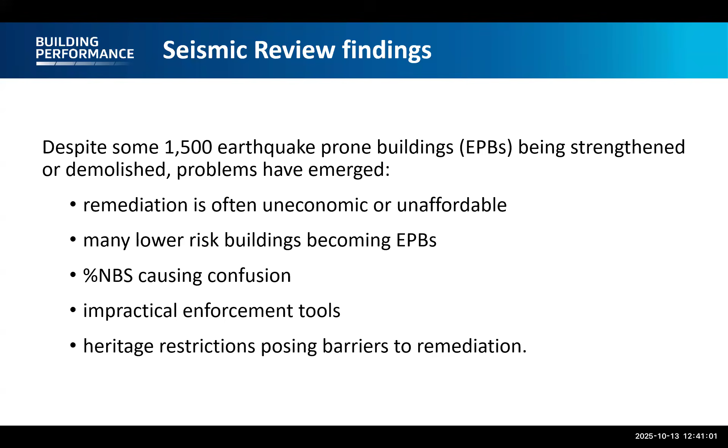And unfortunately, you can see the same situation all up and down main streets across provincial New Zealand. This is not an isolated case. This is actually quite a mainstream problem that provincial centres in particular are having.

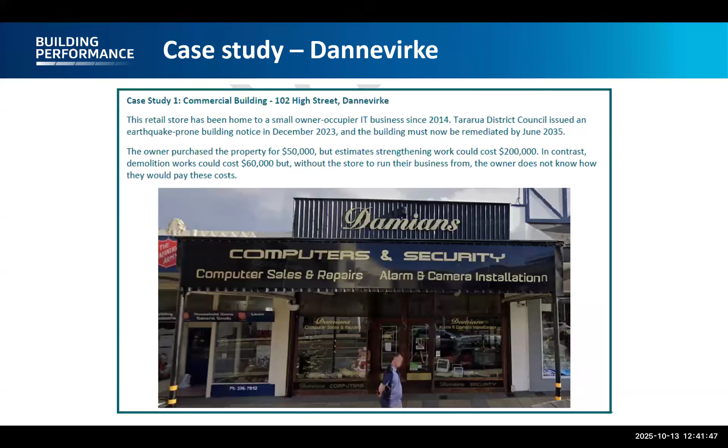So a fairly typical example, a couple have bought a building with a view to doing it up. They thought the remediation would cost 400,000. It ended up costing 600,000, and this couple, at least in the news article that I read, were blaming at least some of that on over-enthusiastic engineers who were perhaps building in a bit more redundancy than this couple thought was necessary.

And there's some interesting points that come through this. And one of that is that there's quite a lot of myth and reality around the EPB system. I wouldn't take all of this necessarily at face value, because another thing that we hear a lot about, which actually isn't the reality, as far as I'm aware, is that we hear a lot of talk about shifting goalposts, and the earthquake strengthening requirements are always going up. So what we do now won't hold later on, which just isn't true. And MBIE hasn't run the system like that at all.

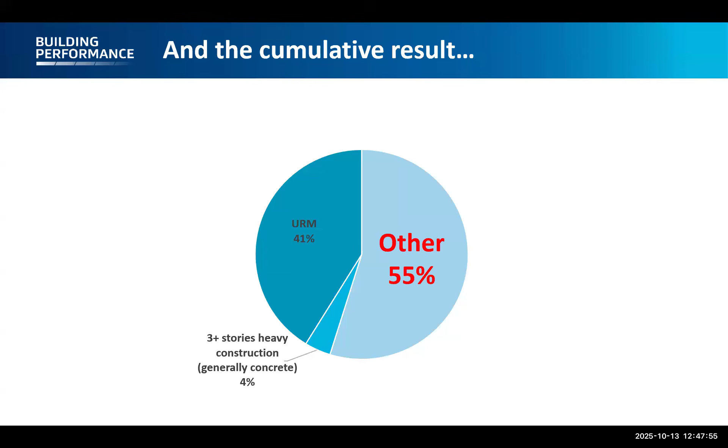The reason for that uncertainty is a lot of property investors or would-be property investors are looking at a property and going, yes, well, maybe it's not an EPB now, but how do I know in 1 week's time, 6 months' time, 2 years' time, it won't be an EPB? So no, I'm not going to invest any money in that building. I'm not going to do it up. I'm having nothing to do with it. And you can imagine that all of those people saying that all up and down the country is actually impacting on the use and investment of property types in New Zealand.

So in light of all of these issues, here is what the government is proposing in terms of solutions. Firstly, only two kinds of buildings will be able to be EPBs, and they are unreinforced masonry, which is profile category 1 of the current profile categories, and multi-story, that is 3+ story buildings of concrete or heavy construction, which is profile category 2. Profile category 3, which is the pre-1935 buildings, is taken out of the system, so that will no longer exist.

And a further filter is that only those kinds of buildings in medium and high seismic zones can be EPBs. So that is to say, any EPB in a low seismic zone will no longer be an EPB, and no new EPBs can be added in low seismic zones.

There will be cheaper and simpler mitigation requirements for the remaining EPBs. And when I say cheaper and simpler, I actually mean more cost effective, because they will still manage risk. And Ken is going to spend quite a lot of time talking about how these solutions still manage life safety risk. But one thing I do need to emphasize is that the proposed changes won't come into force until a new law is in place. And until then, the current requirements continue to apply.

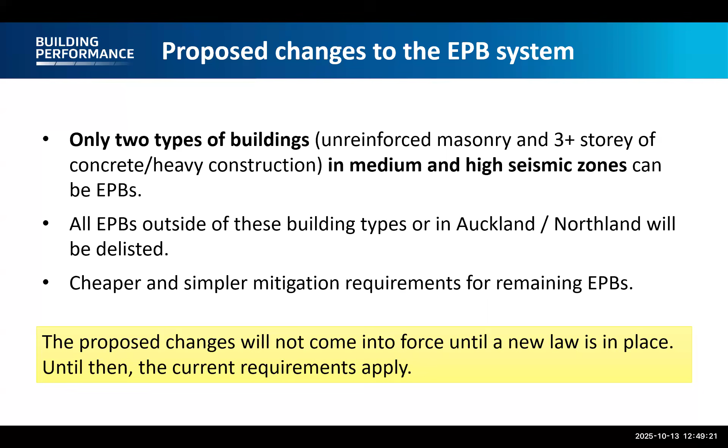Whereas for unreinforced masonry buildings, if they are 1 to 2 stories and they're in a rural area or a small town, they will only be on the EPB register. They won't need a physical notice, and they won't have a seismic work requirement. So they'll have no deadline, no notice on the door, but they will be recorded on our register, and prospective owners or tenants will be able to look up that building and determine its status from our register.

Those same buildings, however, if they're in an urban centre, 1 to 2 story URM buildings will require their facade to be secured. And when we talk about facade securing, we're talking about the facade that fronts onto any public space or elements of the facade that are above any neighbouring buildings. That facade securing requirement, again, applies to 3+ stories in rural or small towns, but for the small number of 3+ story URM buildings in urban centres, they will require a full retrofit, which is equivalent to the current requirement to get beyond 34% NBS.

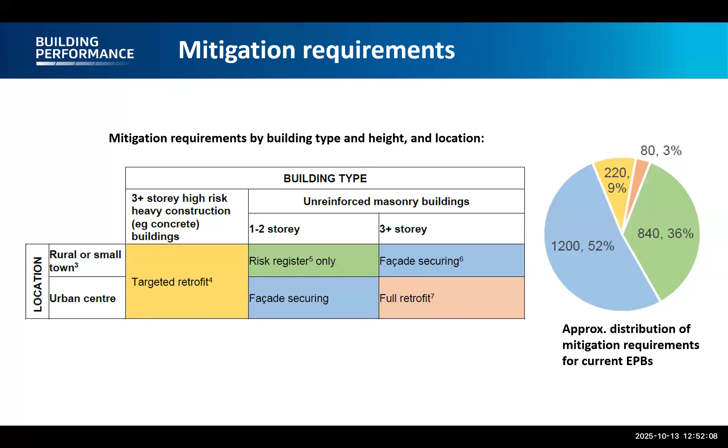So it's worthwhile bearing in mind that the 3% of buildings that require a full retrofit is a reduction from 100% of buildings under the current regime that would have required a full retrofit. In other words, 97% of all EPBs in New Zealand will have changed remediation requirements. There's also a bunch of other changes that we're going to be making, which I'll briefly run through.

We're changing the alterations requirements so that a building consent for seismic work and only seismic work that meets or goes beyond the building's remediation requirement will no longer trigger the requirement for concurrent work to meet other building code provisions relating to escape from fire and disability access and facilities.

The government is well aware this is quite a big call and there will be voices for and against it, but it actually responds to a recommendation that was originally made by the Royal Commission back in the day. And the reason is that building owners, rightly or wrongly, have reported that they are being put off doing the seismic work because of these additional requirements. And ultimately, it's a question of, well, what will save lives here? And so the government is looking to change those requirements, but only as they apply to earthquake-prone buildings, not for any other buildings.

Just in terms of change of use, when an EPB is changing its use, instead of needing to be as near as possible to the relevant building code standard, it will only need to meet its mitigation requirement. And importantly, where that building is a 1 to 2 story URM in a rural area or small town, the mitigation requirement is just to be on the EPB register. So there will be no requirement for seismic work.

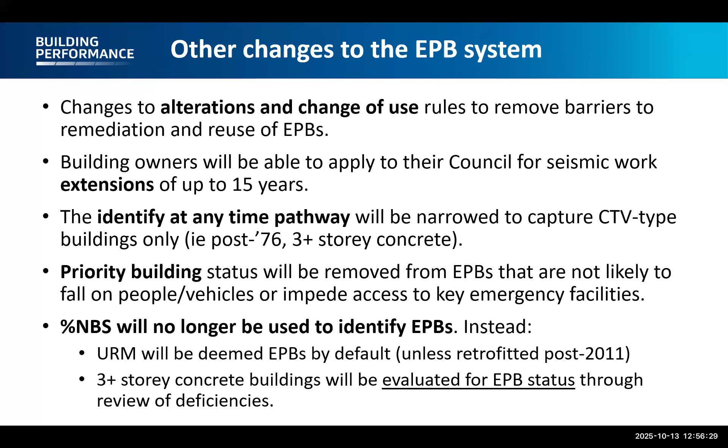And multi-story concrete buildings will be evaluated for EPB status through a review of deficiencies. And that review of deficiencies is at the very core of the methodology for targeted retrofit, which Ken will be talking to very shortly.

So just on the timeline, the government has a very ambitious agenda for this bill. The minister's told us very clearly that he would like to see this bill passed before the House rises for the election next year. So that's likely to be around September, if all goes to plan. And the bill would commence, that is, all of the changes that I've been talking about will actually come into effect around

mid-2027. What this means is the opportunity to comment, and we sincerely hope and encourage everyone who's watching here to review the bill when it comes out and make a submission to the Select Committee. That's likely to happen early in 2026, and it will run between 4 or 6 months. We're not quite sure about that yet.

Right, so that's the end of my part of the presentation. I'm now going to hand to Ken, and Ken will be talking about how we actually arrived at this current policy proposal and the kind of thinking that's gone into it.

All right, thank you very much, Chris. Glad to see so many people registered here online. I really felt quite privileged to be involved with this effort here at MBIE. And I hope I've taught Chris as much about engineering as he's taught me about policy in this process.

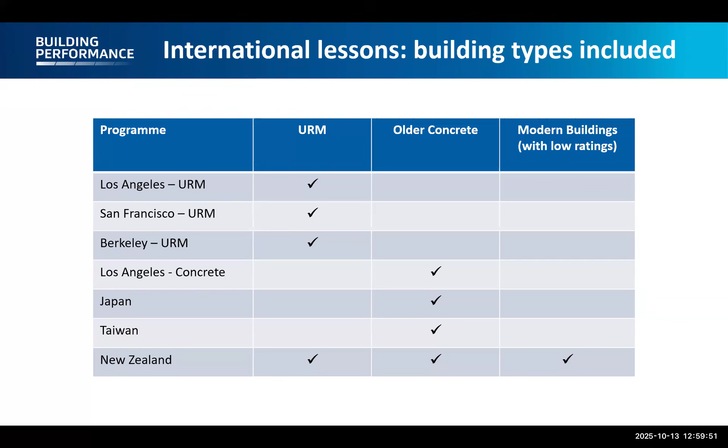First of all, if we look at these programs internationally, they tend to focus on one building type at a time. In the case of California, where these are city level ordinances, they are specific ordinances for specific types of buildings, unreinforced masonry buildings or older concrete buildings. In Japan and Taiwan, the programs were really just focused on those older concrete buildings. Whereas here in New Zealand, we basically built a system that could address all buildings, as long as they had low ratings. So we probably built in some additional challenges by having such a wide scope. Perhaps there's some advantage to these systems that focus on specific building types.

Another interesting aspect looking abroad is that none of them use a rating system similar to percent NBS in identifying what buildings are considered within the seismic mitigation program. Instead, as I indicated, the programs were building type specific, and the criteria for what buildings were included within the program was very prescriptive. Essentially based on the date of construction and specific structural characteristics. A couple of examples shown there from URM law in California and the non-ductile concrete program starting up in San Francisco.

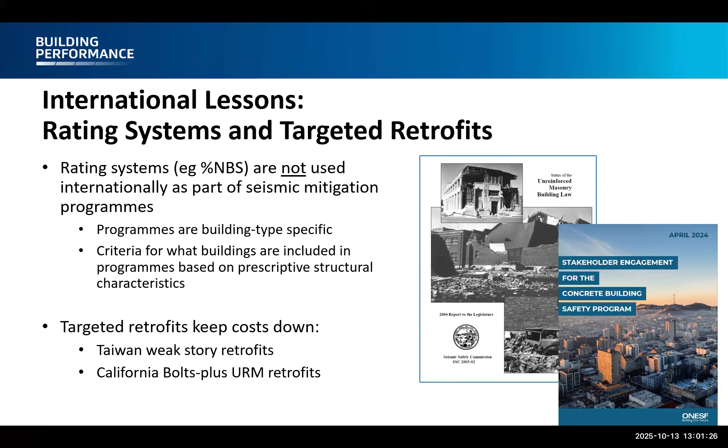We also noticed that there were a few cases where they specifically developed these sort of targeted retrofits to try to keep the costs of those retrofits down. Two examples stand out. One is in Taiwan, where they focused on weak stories as their primary deficiency within concrete buildings and developed targeted retrofit approaches for those weak story buildings. As well, the Bolts Plus approach for unreinforced masonry buildings in California is essentially a form of targeted retrofit to address the worst vulnerability in those buildings, which is the unsecured facade.

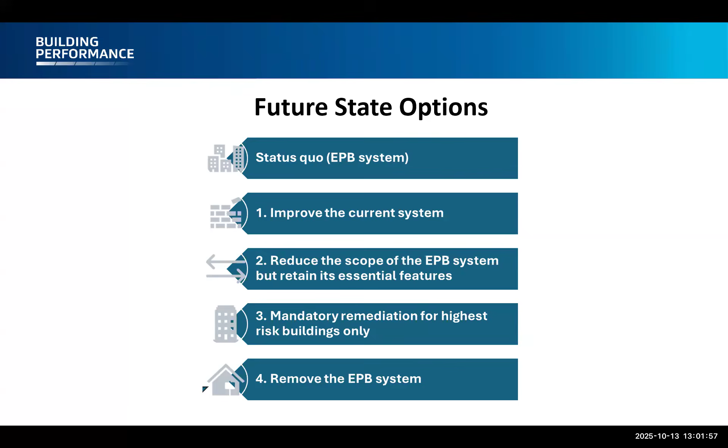So with that background, then we considered a whole range of possible future state options for the EPB system. And these options ranged from the status quo, the current system, all the way through to fully removing the EPB system, and then many different increments in between. I like to think of this sort of range of options by thinking about a balance between the regulated cost on one hand and the residual life safety risk of the changes on the other hand.

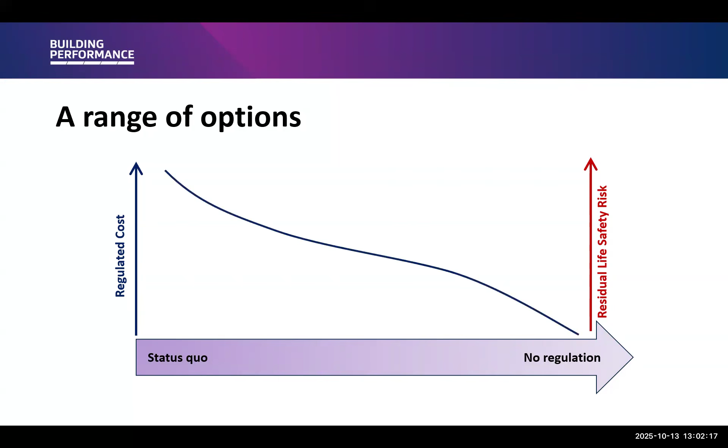Of course, as you move from the status quo toward no regulation, your regulated cost is reducing. But as we reduce that cost, reduce the number of buildings within the system, that of course implies that there's a little bit more residual life safety risk with each of those subsequent options. And so really what we're looking for is sort of a sweet spot in the middle, where you're balancing that cost and life safety risk. If you're a purist and you really want to focus on just the life safety risk, well, then we need to recognize the fact that under the status quo, we're not necessarily getting that full compliance.

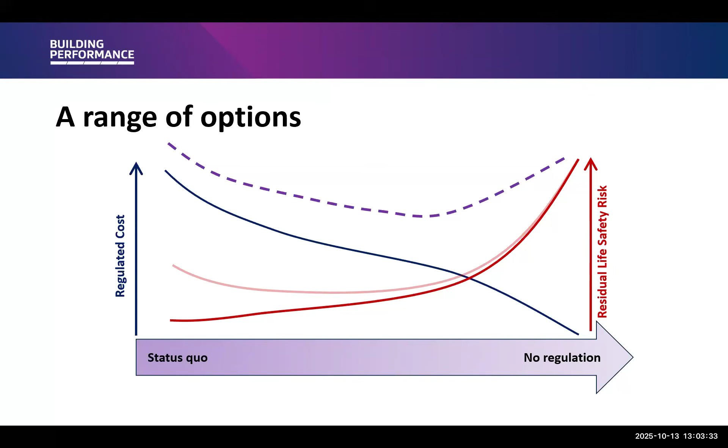And so perhaps we also need to lessen off a little bit to try to improve that compliance and maybe the life safety risk when we consider the barriers to compliance. Maybe actually the life safety risk is generally similar across several of these options. But what we're really trying to do here is look for that sweet spot where we balance off the cost and life safety risk. And where we ended up is a system which is risk focused or risk based.

And risk, of course, has three fundamental components. There's the seismic hazard, there's the building vulnerability, how vulnerable is the building to collapse and severe damage in an earthquake, and then the consequence, or in other words, the human exposure to that damage in the building. And it's really the combination of these three that forms your risk, your life safety risk. And so you're probably all familiar, of course, with risk matrices. Well, with three different components, we need to really make what you might call a risk Rubik's Cube.

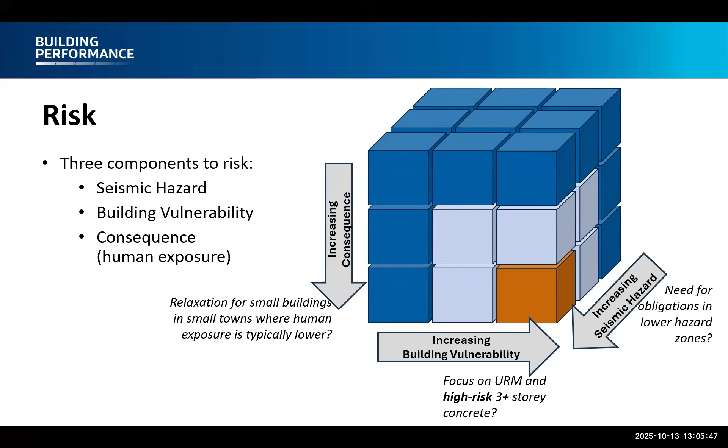First, let me just address the seismic hazard aspect, and then I'll come back to this risk cube to talk more about the mitigation actions. So the first decision by the government was to remove the low hazard zone from the EPB system due to the lower risk that is posed there. If we look at the current map of the seismic zones, you'll note both a low zone sort of north of the Bombay Hills, if you will, and coastal Otago.

But we know that we've learned a lot about seismicity since the time this map was drawn based on the 1170.5 2004. So if we redraw that map based on new understanding of the seismic hazard from the National Seismic Hazard Model and what is incorporated within the TS, which is due to be released shortly, we notice that the seismic hazard in coastal Otago is really not as low as Auckland and Northland. And so it was based on this that there was the decision to move coastal Otago to a medium zone.

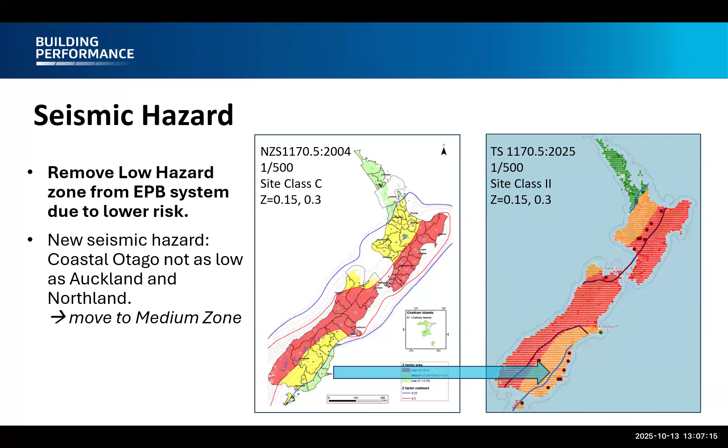But otherwise, the boundaries between medium and high seemed reasonably close enough. And so the boundaries were all left alone, with the exception of simply moving coastal Otago to a medium zone. So let's now come back to this risk Rubik's Cube. And it seems fair that in the lower risk areas and lower risk conditions, we might have no mandatory mitigation requirements, whereas in the highest risk conditions, we require full retrofit.

And what about that intermediate point, that intermediate risk? Well, that's where we land on this concept of targeted retrofits. For an unreinforced masonry building, this would be facade securing. That provides you that sort of intermediate level of protection that's commensurate with the risk that those buildings pose. So let me walk through what these different retrofit requirements would involve.

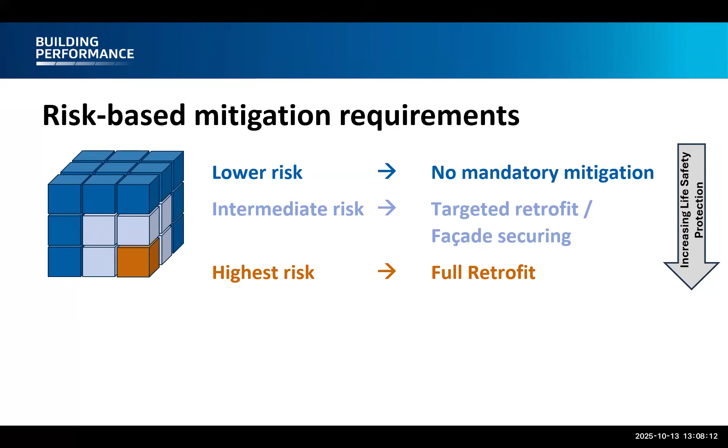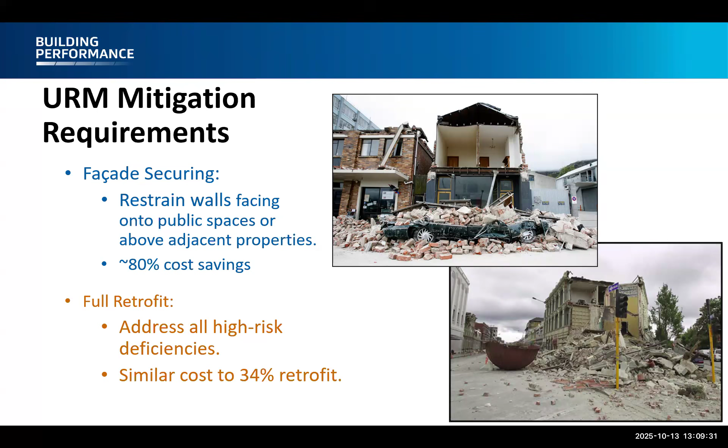However, when we start getting up to above 2 stories, 3+ stories, then actually the buildings and the vulnerability is quite a bit more complex, and the risk is higher. And so there we require a full retrofit, and that is to address all of the high-risk deficiencies within the building. It's essentially a similar cost to a 34% retrofit. And there it's not just sufficient to restrain the facade.

When we come to concrete buildings, we want to take this targeted retrofit approach where we target these highest risk deficiencies. Really, what we're looking for is the biggest bang for buck, the greatest risk reduction per unit cost. Okay, and the exact level of cost savings you're going to get is going to vary, and it's going to vary quite a bit, but on average, you might get about a 20% cost savings for a targeted retrofit.

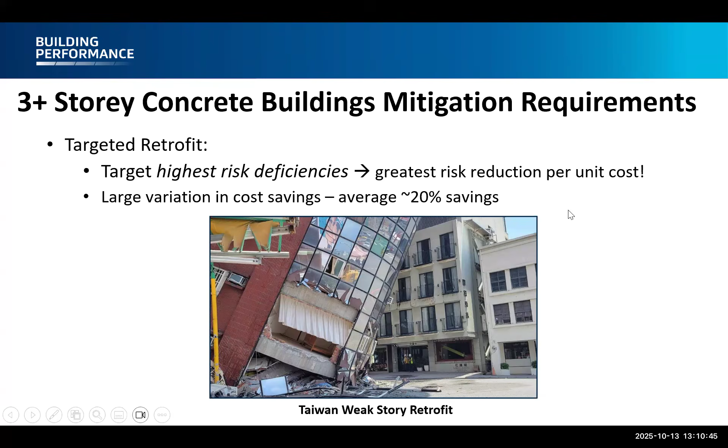As I mentioned before, Taiwan has implemented a program like this called their Weak Story Retrofit Program. This image here shows a building in the background that has a brace in the window where clearly it has been retrofitted and survived the earthquake, whereas the building in the foreground was not so fortunate. And so it's a clear visual demonstration of the benefits of such a retrofit approach. Now, these targeted retrofits need to target these high-risk deficiencies. And so let's talk about those next.

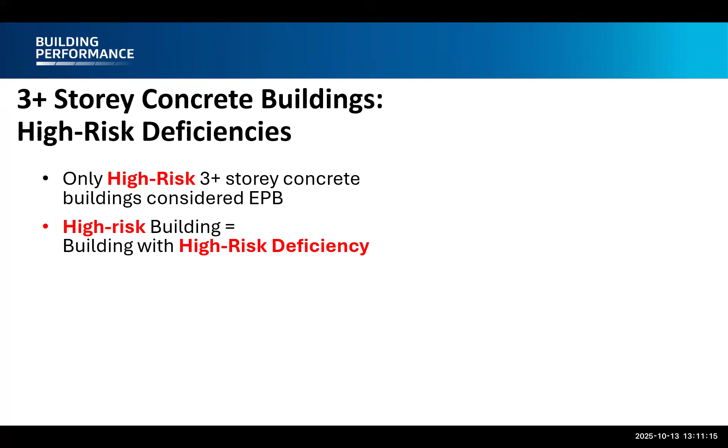You'll notice that we talked about the system as targeting only the high-risk 3+ story concrete buildings. A high-risk 3+ story concrete building is a building with high-risk deficiencies. And so you might ask, well, what is a high-risk deficiency? Well, unfortunately, I can't give you a definitive answer on that right here and now, as we're still working through the details of what exactly is going to define a high-risk deficiency, but this will form part of the methodology. I show here a few examples of buildings with high-risk deficiencies. Of course, some of the examples from Christchurch there, obviously the CTV building.

Often, one of the characteristics of buildings with high-risk deficiencies is that it's a combination of a deficiency within a component and a deficiency of the entire building that drives the demand on that component. So in the example of CTV, you might say that component is a non-ductile column, and the building characteristic that drives the demand on that column, to make the drifts high on that column, is the torsional response of the building, with the core being set outside the plan of the building.

You've also got the Smith's car park, where you've got non-ductile slab column connections in a building that is going to drift a lot with essentially only a slab column frame as its lateral resistance. And so those large drifts combined with the non-ductile slab column connection, that gives you that high risk deficiency.

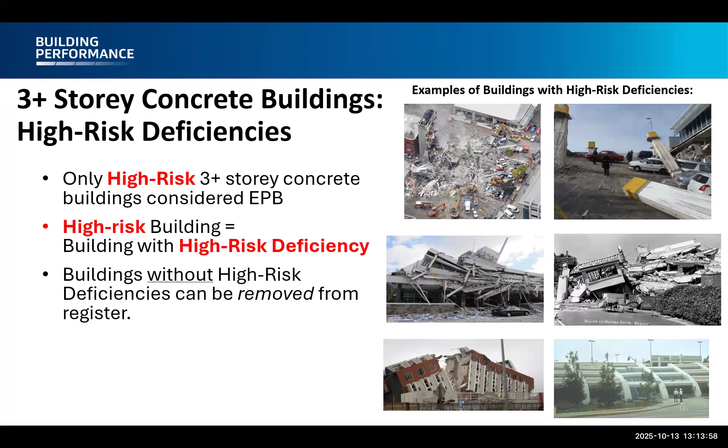So these will be defined quite prescriptively within the EPB methodology, and we're working through that process right now. A building that does not have high risk deficiencies, though, can be removed from the register. So that means that some current 3+ story concrete building EPBs which do not have these high risk deficiencies actually may be able to come off the register.

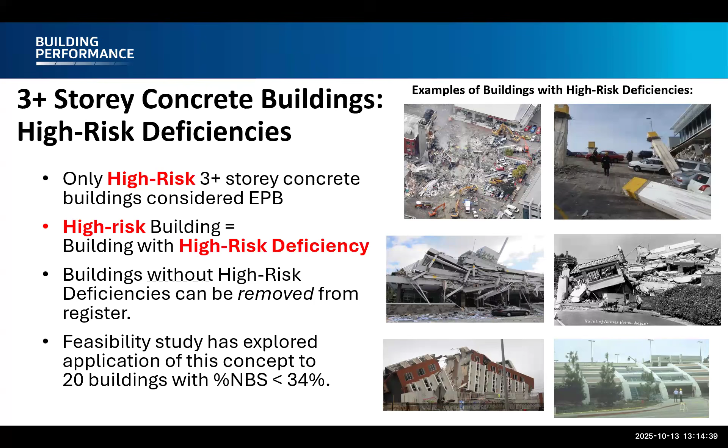A feasibility study has explored the application of this approach and has looked at applying the concept to about 20 buildings that had percent NBS less than 34%, and it was found that about 10 of those buildings actually did not have high-risk deficiencies and therefore would have been able to come off the register. So as you can see, this is still a work in progress, but we're quite confident this is all going to give us a good procedure for identifying these high-risk 3+ story concrete buildings.

From all of this, though, there will be residual risk, right? We're taking some buildings out of the system. We're taking some vulnerabilities out of the system, so 1- and 2-story concrete buildings or masonry or reinforced masonry buildings will not be captured. There will be some residual risk there. If the building is only identified because of its lateral system, but there's no failure of a vertical load bearing element, then it could potentially be removed from the EPB register.

And buildings where it's only secondary structural or non-structural systems which are triggering the EPB status, those would no longer be EPB. What all of this emphasizes for us is the importance of maintaining a voluntary mitigation alongside our mandatory system, the EPB system. And I'll come back to that point in just a minute.

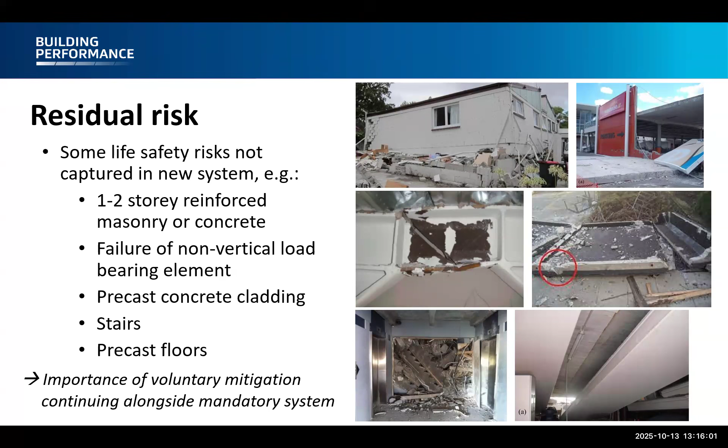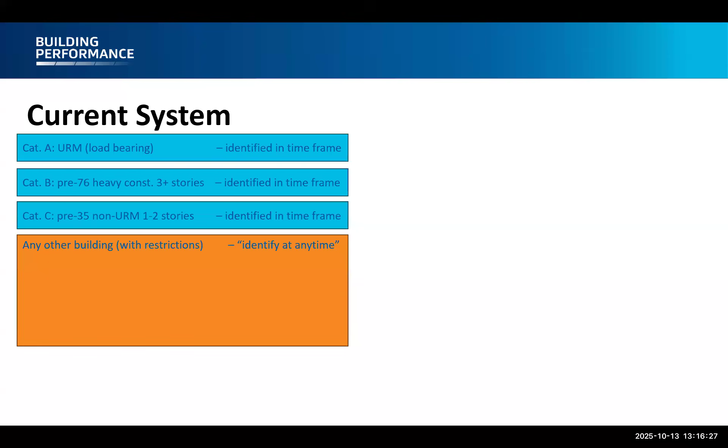I just want to talk in the next couple of slides about some transition aspects. As you're all aware, we currently have 3 profile category buildings: Category A, Category B, Category C. And then we have this anytime pathway where any other building, there are some restrictions, but essentially any other building can be identified through this anytime pathway.

In the new system, we're carrying over largely the definition of Category A, and we're carrying over the definition of Category B. Category C is no longer considered within the system. This is largely because of the 1 and 2 stories, lower risk, lower exposure, but as well, those pre-35 non-URM buildings tend to have smaller bay lengths, more columns, less vulnerable. But then you'll notice that the anytime pathway is quite a bit narrowed compared to the current system. The anytime pathway is only for those post-76 buildings of heavy construction, 3+ stories.

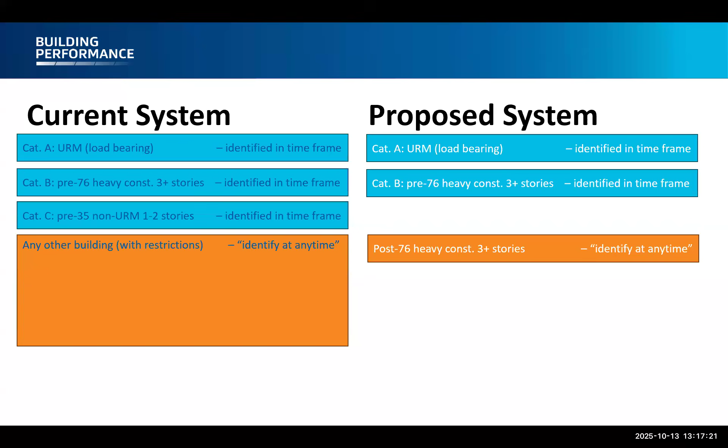Further to this sort of transition from the current system, you might just ask, well, we've already identified a lot of these profile category buildings, and indeed we have. In fact, High Zone has essentially finished the identification of all the profile category buildings. Medium Zone is nearly finished the identification of profile category buildings. So we're really working with what's already on the register. It's really only in Dunedin and Coastal Otago where they will need to continue to identify these buildings, and they have until 2032 to do so. The post-76 buildings would only be identified through this anytime pathway, which is a similar pathway to what we have today.

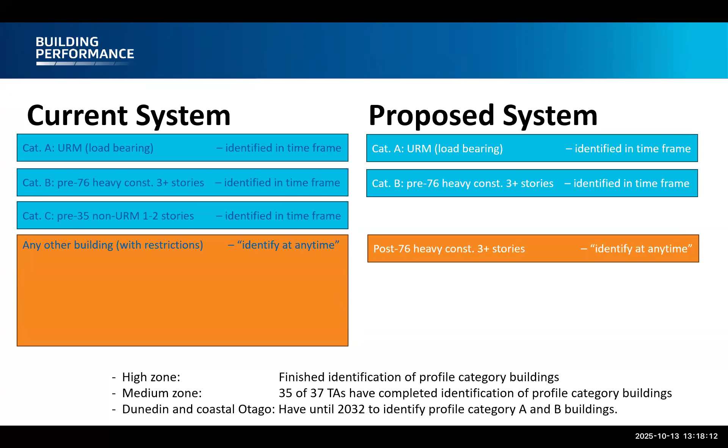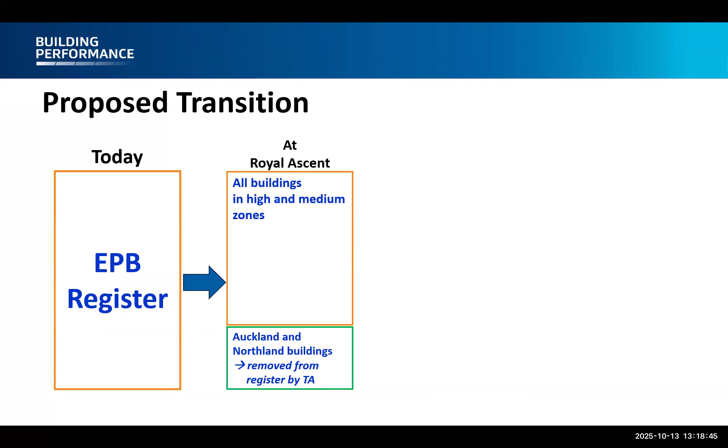Now let me talk about one other transitionary aspect, and this is how we move from the buildings that are on the EPB register today to the future EPB register. And essentially, we're going to take this in 3 steps. So the first step will be at Royal Assent to remove any buildings in Auckland and Northland, as they're no longer part of the system, and that's quite easily done. Then we're just left with what's in the orange box there. And then we'd propose that at commencement, all buildings other than the unreinforced masonry or the 3+ story buildings of heavy construction in high and medium zones, all other buildings would then be removed at commencement.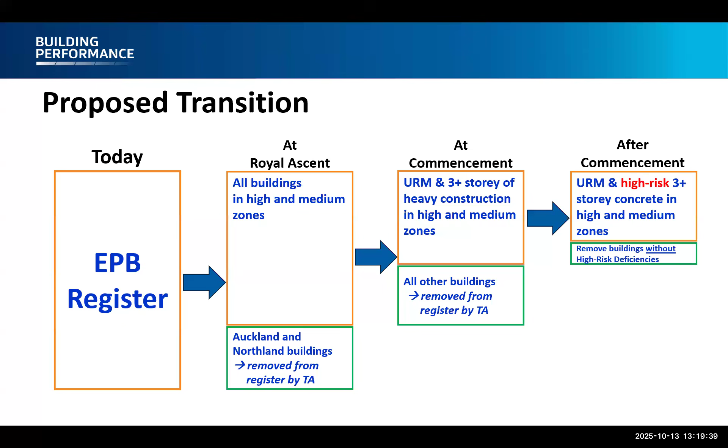Then finally, after commencement, we'd focus in on those high-risk 3+ story concrete buildings, and there would be the opportunity to remove buildings that do not have those high-risk deficiencies. So sort of a 3-step process to getting down to the final updated EPB register. And of course, buildings in, say, Dunedin or Otago that are identified in due course would be added to this updated register.

So what is the future of percent NBS and seismic assessments? As we've said, and Chris identified, percent NBS will no longer be a specific feature of the EPB system. Buildings will either be EPB or not EPB, and buildings will be identified as being EPB based on their structural characteristics. That is to say, whether they have these high-risk deficiencies. These high-risk deficiencies will be identified by engineers by a specific process laid out by the EPB methodology. But identifying those high-risk deficiencies will draw upon information that is contained within prior seismic assessments, such as DSAs. So those assessments are still definitely very much of value.

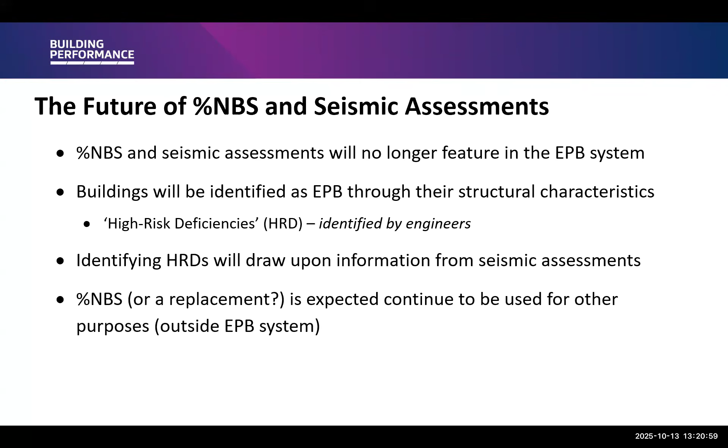It is expected that there will be some demand still for assessments outside of the EPB system, perhaps via percent NBS or perhaps a replacement. Just in terms of what this could look like, the current system, of course, defines EPB based on that percent NBS. The proposed regulatory system that we've just been talking about is binary. You're either EPB or not EPB. But there's a need perhaps still to consider performance across that range of non-EPB buildings.

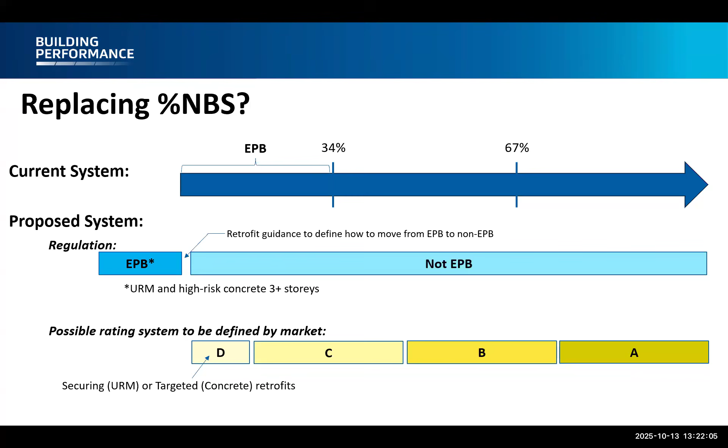And one possibility of a system that could be defined by the market might be sort of a categorical system to define those non-EPB buildings, where you could imagine the securing of URM facades and targeted retrofits for concrete buildings might just slot in there under D, but you want to recognize if somebody wanted to retrofit to a higher level. Part of the advantage in my mind of having some sort of a categorical system like this is you could also have some sort of risk-based adjustments that move a building from one category to another, depending on the risk characteristics of the building.

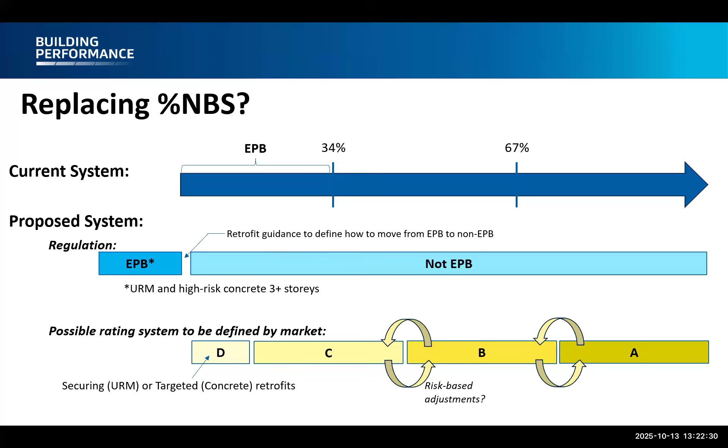But all of this is yet to be defined, and really is something for the market to define. It is not part of the regulatory system. It is not something that MBIE intends to define.

Essentially, the changes that we've just talked about here today keep the same structure. The only thing that we're doing is we're shrinking and changing the language a little bit for that earthquake-prone section. And so it's now specifically based on the building characteristics.

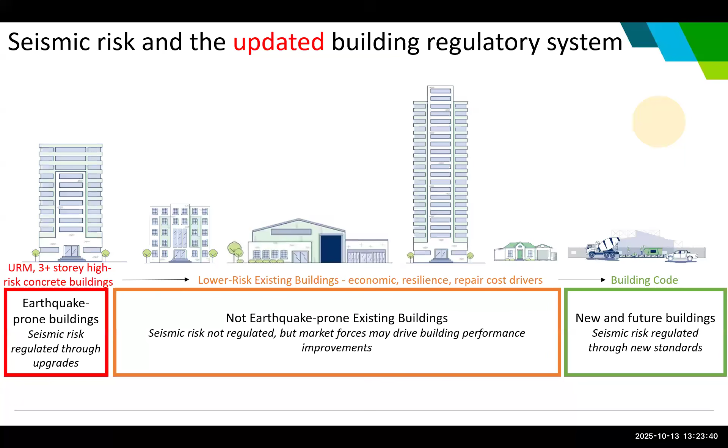That does mean that there are some more buildings entering into that orange box in the middle, and it just emphasizes again the importance of thinking beyond just simply how we approach earthquake-prone buildings. But I encourage the profession to be thinking about how we approach buildings outside the earthquake-prone regime.

And with that, I come back to the schedule that Chris shared earlier. You'll notice a couple of dates to bear in mind here. First of all, expect to be going to select committee in 2026. This will certainly be an opportunity to comment on the system.

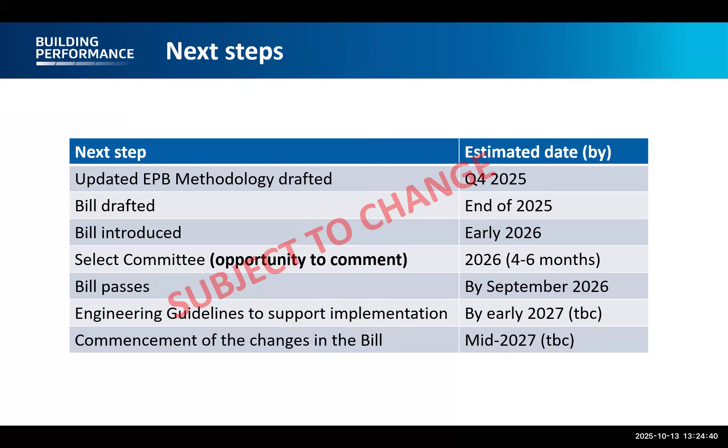And the engineering guidelines, which would support the implementation, will be developed as we go along, and expect them to be available sometime, let's say early 2027. And there'll be opportunity to comment on those as well prior to publication. So I think with that, we open it up for questions.

Right, thanks, Ken and Chris. So we'll crack into the Q&A. So I guess there's a few things to cover. We're going to start with the questions that were submitted to Engineering New Zealand when people registered for the webinar.

A couple of things to note, as Ken and Chris have mentioned this morning, the system's still being developed, so not all the details have been finalized yet, so there could be some questions that Chris or Ken may not be able to answer, so please be aware of that. And if we run out of time and we don't get through all the questions, Engineering New Zealand will forward these on to MBIE so they can be included as they develop the policy further, so they won't be forgotten about. So we'll crack into the first few written ones.

So the first one is, between now and implementation, should owners and engineers proceed exactly under the current EPB framework, including ISAs, DSAs to the 2017 assessment guidelines, and will MBIE issue interim guidance to keep work moving?

Thanks, Stuart. The short answer to that is yes. We should carry on using the current framework. And the reason for that is because the proposal to change the law is only that. It's only a proposal. There's a very long way to go before what you're seeing here becomes the law of the land. It may well change on the way through Parliament.